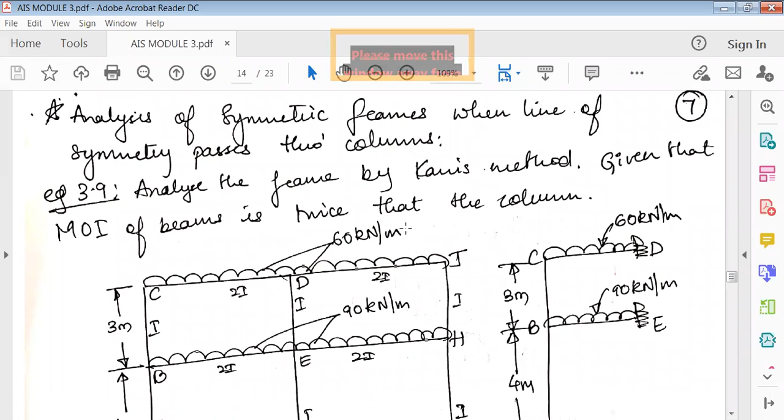Hello everyone. So let us solve the next type of problem. It is analysis of symmetric frames when the line of symmetry passes through the columns. Analyze the given frame by Kani's method.

Given that the moment of inertia of all beams is twice that of the columns. They have not mentioned this in the diagram, but they have given it as a statement: the beams have moment of inertia twice that of the column. So if column is I, the beams would be 2I.

In this given frame, you can see it is a complete symmetric frame. Now, A, B, E, and F form one bay. Next, F, E, H, G is called the second bay.

If you move horizontally, there are horizontal frames, and that is called a bay. If the frames go vertically upward, that is called a story. So this is now two bay, double story - single story, double story, so two bay, two story.

So you can see here, CDJ is carrying a UDL, and BEH is carrying a UDL of 90 kilonewton, this is 60. So again, the frame looks quite big, but that doesn't mean you have to solve it completely.

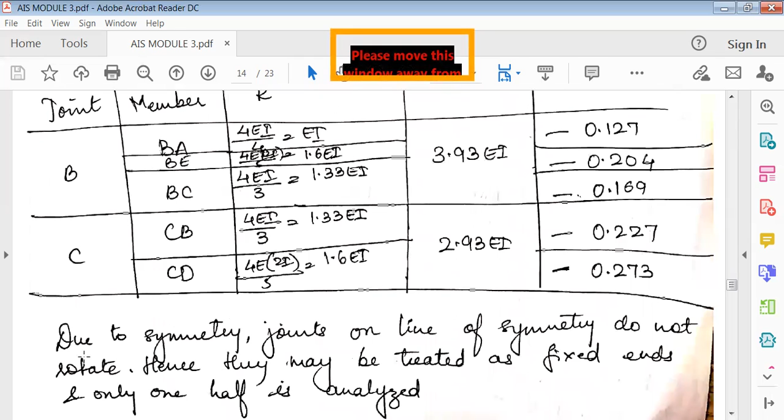Here you have to use a method called axis of symmetry. So what we do here is, due to the symmetry, the joints on the line of symmetry do not rotate.

Because it is symmetrical, see here, if you cut the section exactly at D, E, and F, and flip it over, it's still going to look the same. That means it is symmetrical along the line and along the column, that is D, E, F.

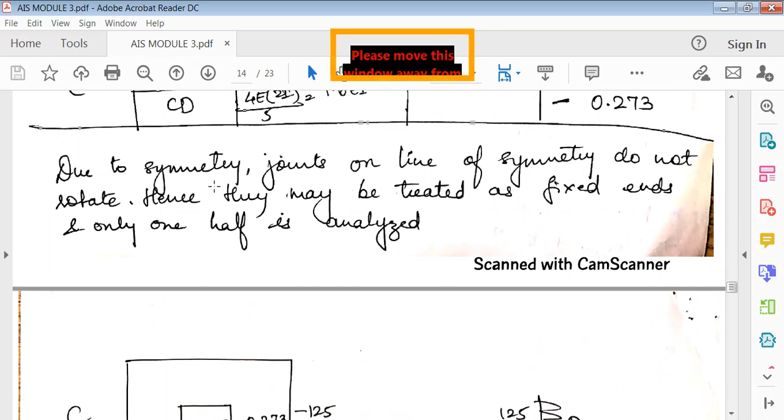So because it is symmetrical along the line of symmetry, due to the symmetry the joints on the line of symmetry do not rotate, and hence they may be treated as fixed ends, and only one half is analyzed. So these are all treated like fixed ends now.

D, E, and F are treated as fixed ends. So only the left side of this we're going to consider. Because it is symmetrical, even the right side would be the same. So now the modified frame looks like this.

You can see here A, B, C. At D it becomes fixed because they don't rotate. E also becomes fixed because they don't rotate. So we'll consider only the left side of this. Only this we are going to solve now.

Now see here, B connects BA, BE, BC. Likewise, C connects CB and CD. So these are the only two joints which we are going to use and find the rotation factors.

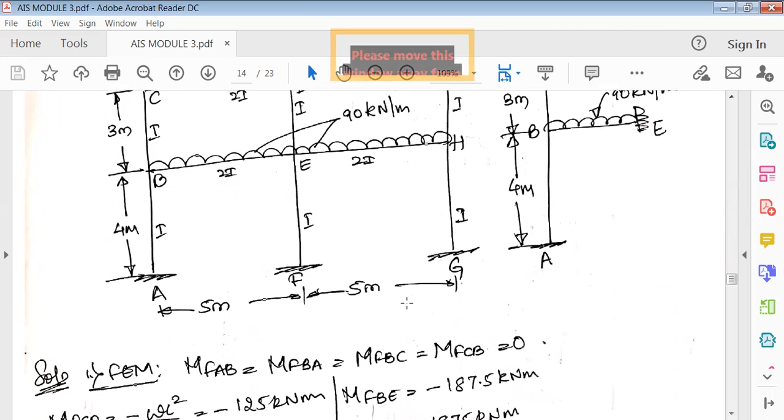First, as usual, find the fixed end moments of all the members. So fixed end moments of first AB. AB, BC, DE, EF, GH, HJ - these are columns which do not have any forces acting on them. Because they do not have any forces acting on them, here the moments will be 0.

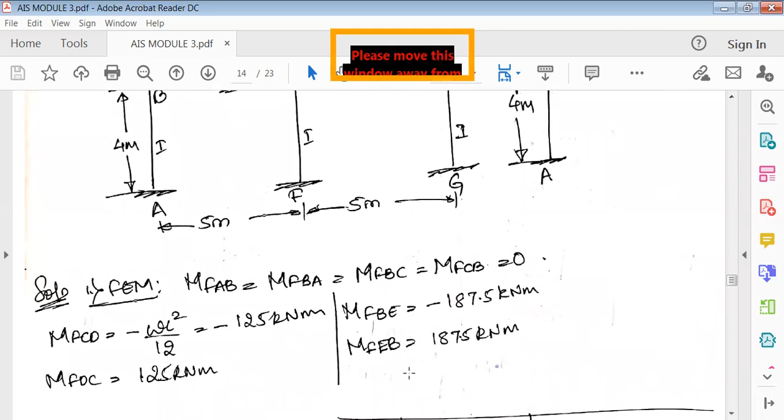Next, MF CD is equal to MF DC, which is equal to minus WL square by 12. And similarly, MF BE is equal to plus or minus MF EB, so it is again WL square by 12. These are the only moments which we're going to find out here.

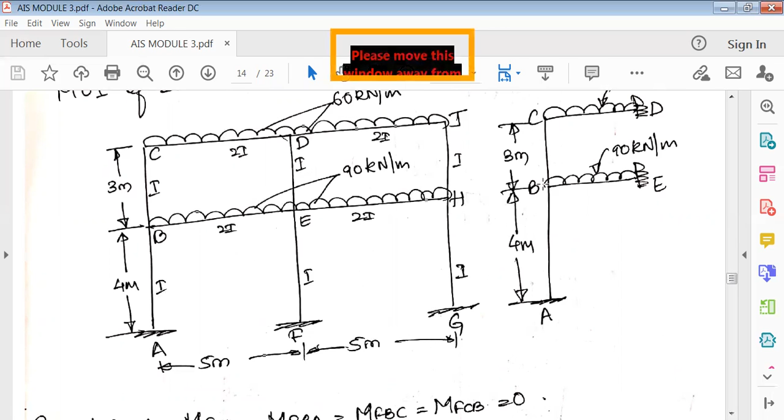We're going to only solve half of it because of its symmetry, because solving this completely becomes very tedious. So we have to make use of symmetry and solve this.

Once you find the moments, next is finding the rotation factors at each joint. So first, BA, BA, BE, BC - again, all are fixed supports. So it is 4EI by L.

4EI by L, whereas in beams, I becomes 2I, so you have to be careful here. Then similarly, BC is 4EI by L, CB is 4EI by L, CD is 4EI by L.

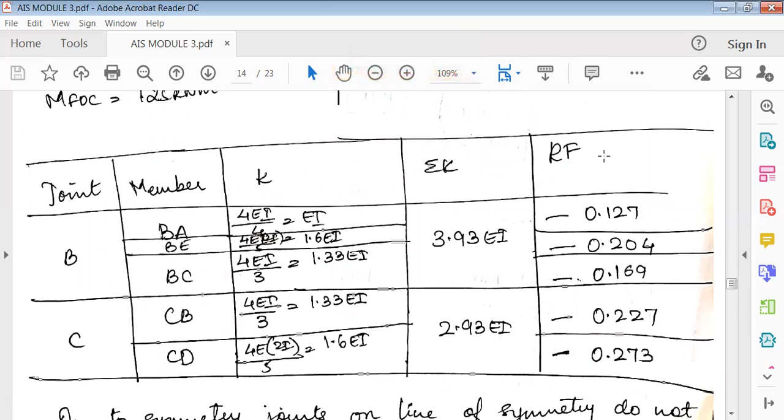Next, find out K, then summation K - summation K for joint B, summation K for joint C. Now the rotation factor is equal to minus half K by summation K. Find all of these and be careful when you're finding the rotation factor.

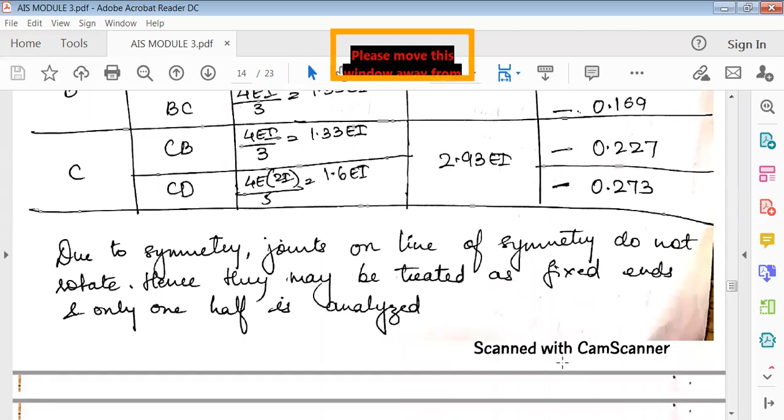It's better you write the formula here: rotation factor equals minus half K by summation K. Remember that you have to multiply it with minus half, so all are minus. Let's assume this - the same figure, I'm going to redraw this and highlight the B and C joints.

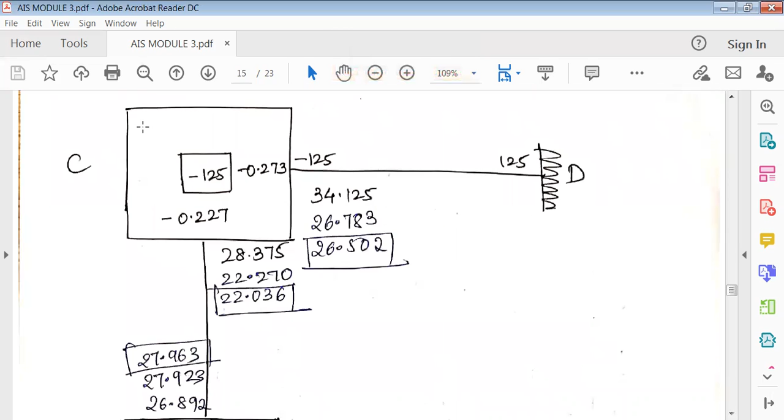Okay, so we're going to highlight joint C and joint B. Again, as usual, write A, E and D joint like this, fixed.

Now at C, write the fixed end moments at C and D. So it's minus 125 plus 125. Here also minus 187.5 plus 187.5. Okay, so then add this.

When you add this and this, there is sum of moment at the joint at C. So it is 125. Here there is no fixed end moment, 0, so it is minus 125. Similarly, minus 187.5 minus 187.5. Again here no moments, so it is again minus 187.5.

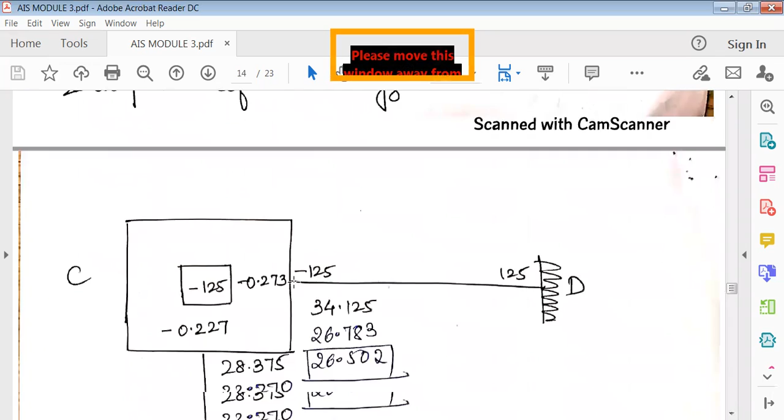Okay, then whatever you have found out here, all these, mark here BA, BC, BE, BC right here. Next CB, CD right here. Okay, next start the iterations one by one.

When you start, always you should start from the left top corner, so that is from this side like this. C, again there is nothing at D, nothing at E, then come back to B. So it is C, then B, C and B. Like this you should go on calculating the cyclic iterations.

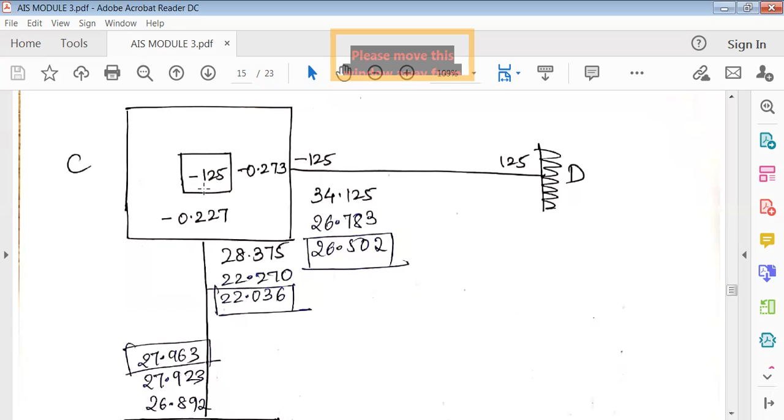So first you should always start with C and then go like this clockwise. So C minus 125, this is minus 125. Then at far end B is the far end, but there's nothing you have to find, because in the first step we have no moments at B. So it is minus 125 into

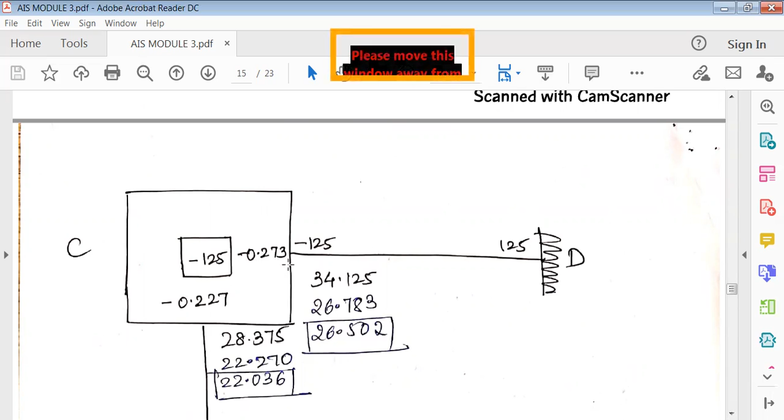minus 0.273, okay, so it's belonging to beam, just write it below the beam. Then this belongs to the column, so minus 125 into minus 0.227, write it here. Okay, so first iteration is over.

Now C is connected to B. Because C is connected to B, write this, it is minus 187.5. So to the far end of B, which is connected to C, is this, we have already calculated, it is 28.375. So minus 187.5 plus 28.375. Whatever answer you get, into minus 0.169, write it here, 26.892, write it here. Then minus 0.204, write it here. So first iteration is over.

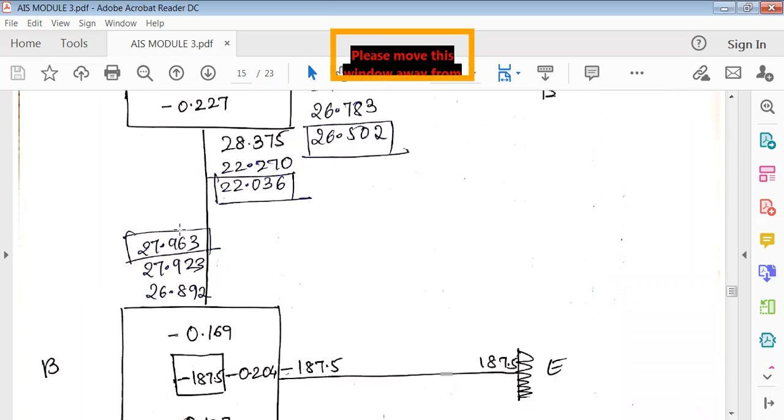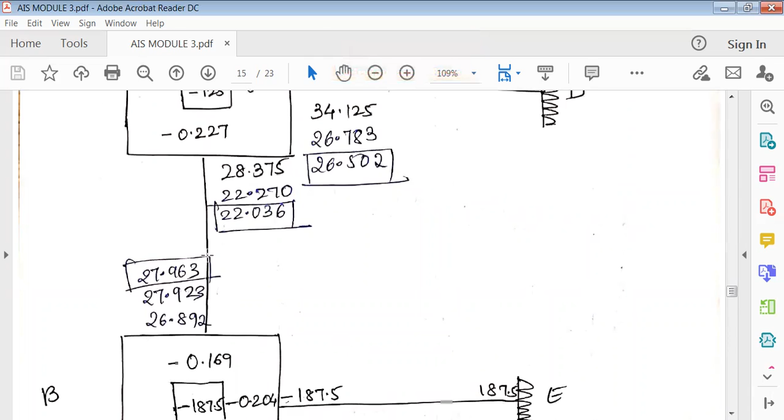Okay, now again come to joint C. So again in joint C, minus 125. Now we've already got the moment at the far end B. So it is minus 125 plus, okay, this moment, because C is connected to B with this moment. So it is minus 125, then plus 26.89, into minus 0.227 into minus 0.273. Write it here. These two moments you have calculated.

Now come to B again. So again minus 187.5. With respect to this, far end is this now, 22.27 into 0.169, write it here. Into 0.204, write it here. Again into 0.127, write it here.

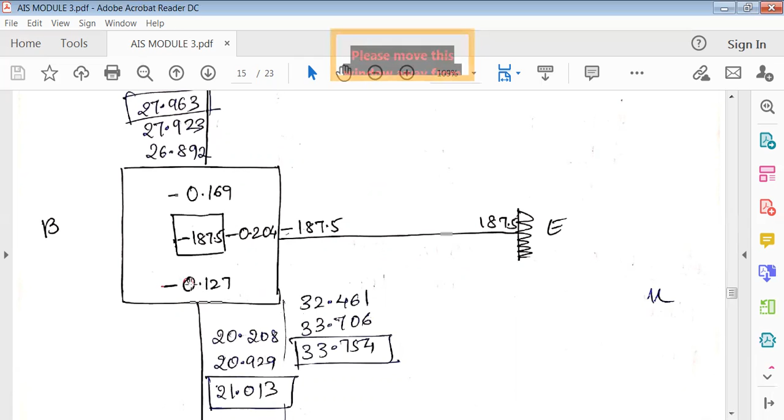So again carry out these iterations. Here you'll end up, here this is 27, 27, 22, 22. So here you end up early. It's like in the third step only you get the answers, which doesn't make much difference. So this is the time where you need to stop.

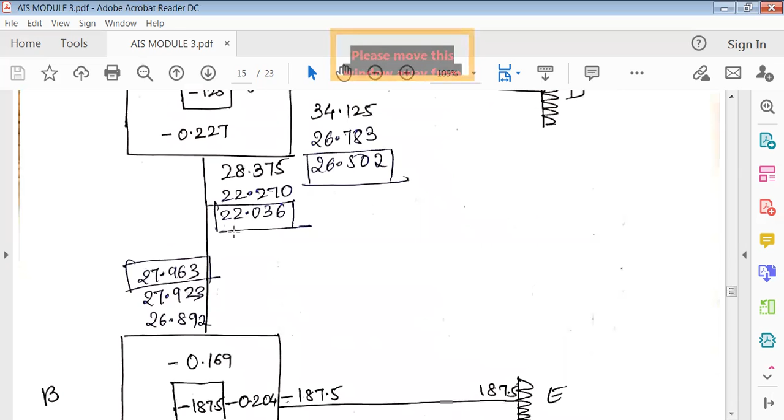Okay, so now these are moments, so this is BA, write it below only, then it is easy for you to understand. This is BA, this is BE, then this moment BC, CB, and this is CD. Write it below here.

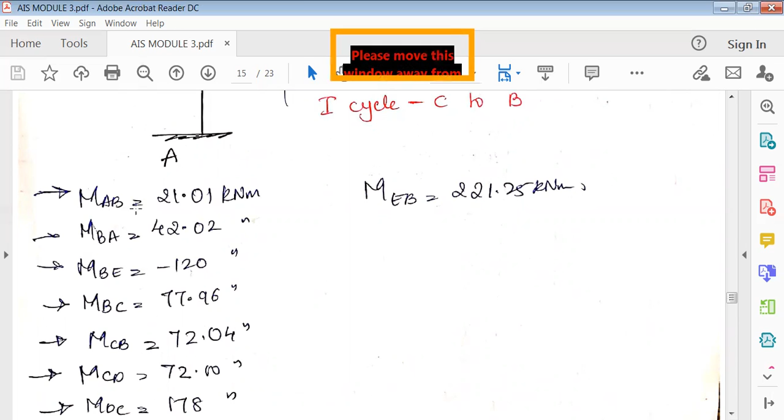Next you have to directly calculate the moments. So we know that the formula to calculate moments is MAB equals fixed end moments. At A there is no fixed end moments, so 0 plus 2 times near end plus far end. So 2 times with respect to A, near end is nothing here, there is no moment, but far end is 21.013, so the answer is 21.013.

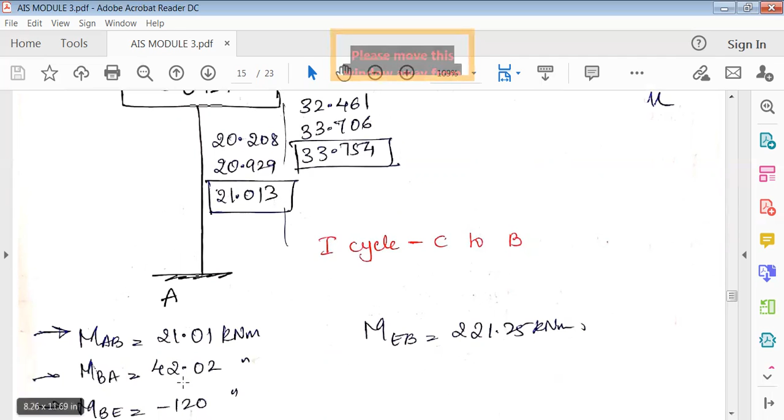Similarly for BA, same thing again, fixed end moment in B, here there is no fixed end moment, no forces. Plus 2 times near end, so 2 times near end is this. So 2 times 21 plus far end is this. Far end is 0, okay, it's 42.02.

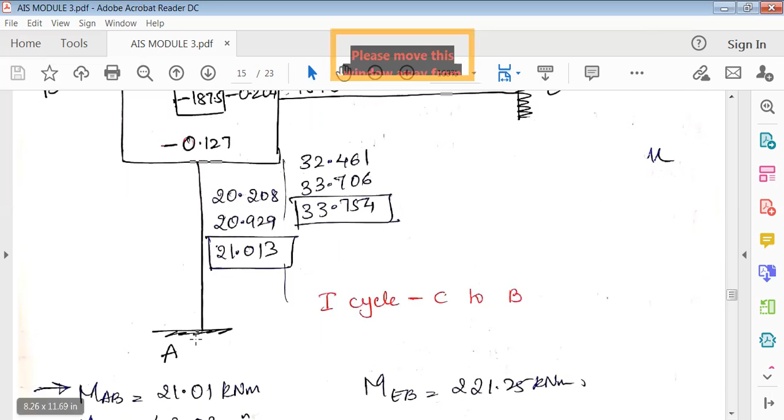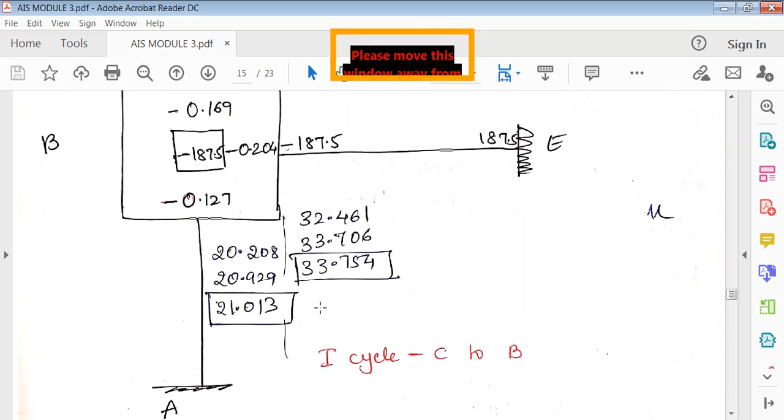So like this you have to go on calculating. Same thing for BE, BC and CD, DC, CB, all this you have to calculate. So the formula is simple, it's fixed end moments plus 2 times near end plus far end. All right, so once you calculate this, next is just mark all the forces in this.

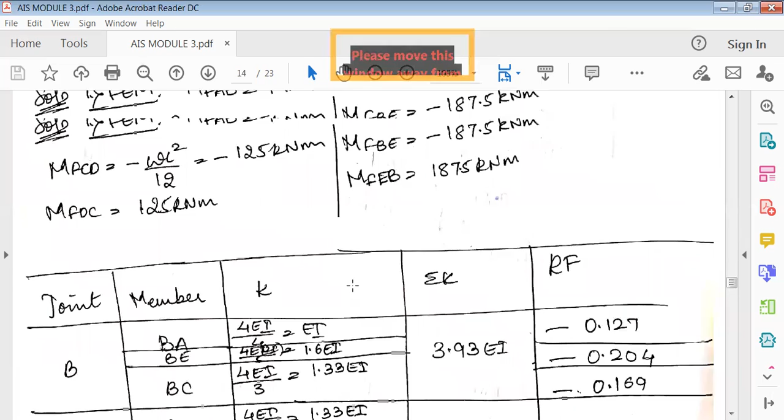Okay, so always you should recognize if they give you such a big problem, you have to find if an axis of symmetry exists or not. If the line exists, then things become simple, then you only have to find moments at joint B and C. All right, that's all for today. Thank you.